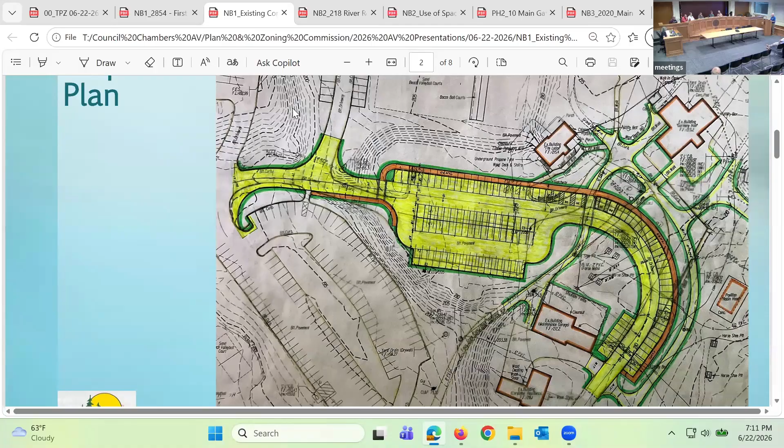So what's important is if you look at the two together, you could see how inefficient that upper existing layout is compared to the proposed. So that's what we're trying to accomplish here, and that's where the majority of our work happens.

Going to the next plan, I want to say it's a summary. Yeah, that's really the summary, rest of this is text on this. Right? So I can go back to the black and white.

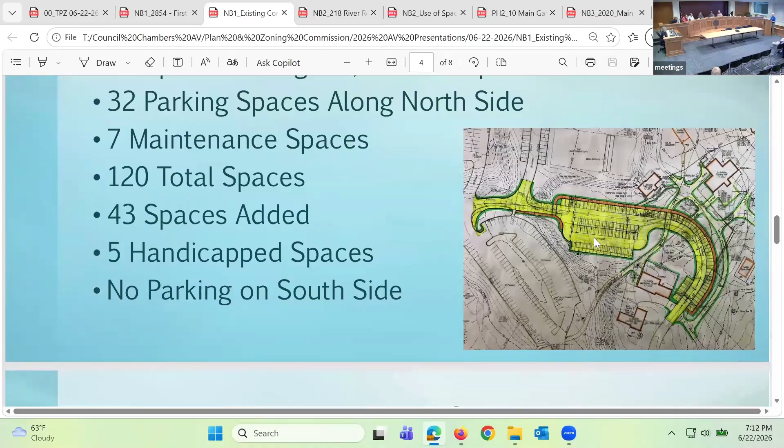Of course, thank you. So looking at this plan, it provides a nicer layout. There's head-in parking along the northern side where people would go onto a sidewalk and find their way into camp. It moves the road away from Garmany Hall, which is the heart of camp, and gives us an opportunity to provide some sidewalks for pedestrian circulation. It's just a much better layout.

As Scott mentioned, we're going to take the opportunity to make drainage improvements where we can. There are some depressed basins that'll act to improve water quality for runoff. There's a total of five, which is something we don't have today, which will give the opportunity to gather water and give it a chance to settle out before we discharge it. So that's a quick overview of the project.

And with that, I'd rather spend our time focusing on your questions. Okay, thank you sir. Commissioners, now it's our turn. Bob, I'll start with you.

All right, thank you for the presentation. I can see the efforts that are causing this modification to put the safety in, because I've been up there before and it is a little bit hectic.

Is this, what time frame are you looking to do this? Are you going to be coinciding with summer day camp? Well, that's a great question. We struggle with that. We cannot interfere with camp at all. That's not an option. And the fall's pretty busy too. You've got some big events going on.

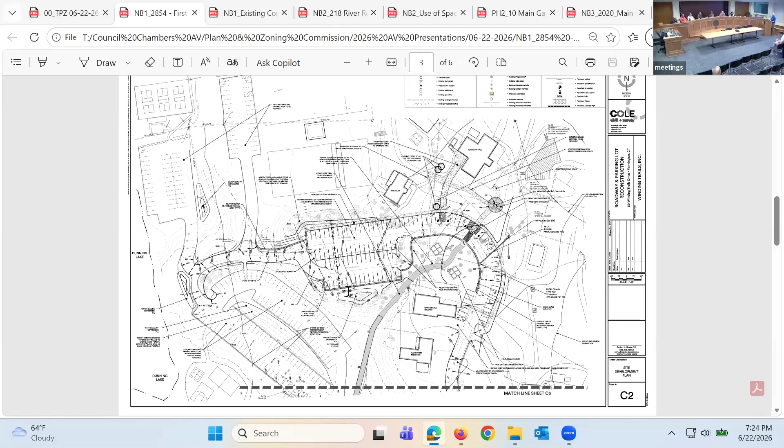Those are very good comments. I have to say the quality of Winding Trails Lake, or Dunning Lake, is the heart of our existence. We care so much about that lake that multiple times during the year we take water quality sampling. That started many years ago, and we can follow trends of water quality, so if there's any change in a pattern, we can see it immediately. We're very serious about that.

Any spillage is an important item. I have a pretty good amount of background with major construction projects and managing them. In this case, our project will follow Connecticut DOT standard specifications. As part of that general requirement, they're very specific about what things are required and what has to be done. We will make sure that if there are any spills, we can address them immediately, because that would be a disaster if something happened.

Accidents happen, it has happened, things like that. You're going to have equipment there for months at a time, doing work off and on around your schedule. Fuel tanks can leak, so if you look at the operation, they're going to do a lot of rough grading, pavement removal, processing the pavement, and compaction. When that's done, a lot of that equipment will no longer be needed.

One question, kind of hinted at during construction—are you going to follow all the proper erosion control protocols, both silt fences and the straw and wattle, especially on the inclines? Shannon, could you please scroll down to the plans a little bit? If we get to the general notes, see the general notes on the left—there's a substantial amount of verbiage geared towards exactly what you're saying. Wonderful, okay.

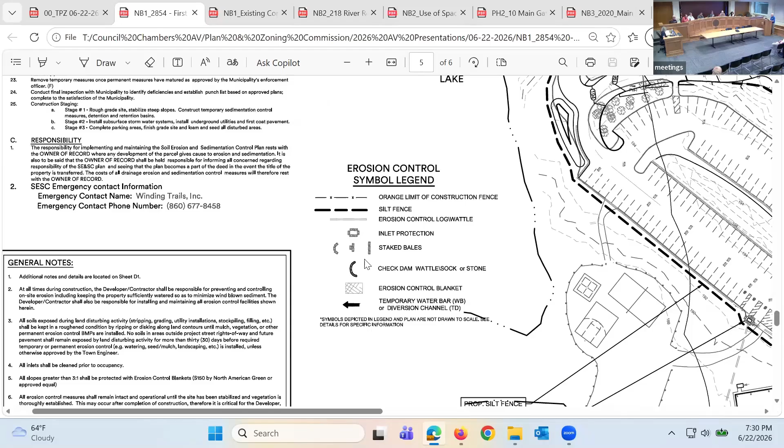Just double checking. Yeah, absolutely. You know, we're self-governing here. We would do that even if we didn't have to. We're protecting, we're the caretakers, and we have a lot invested in this, and we are going to protect it in everything we could do.

Okay, and just one other question—the water retention or depression areas. I see one by the front edge of the new, or the upper lot, I guess. Oh okay, south facing, and then what? Yes, I'm not sure of my orientation. Okay, so that's south facing. And is that going to be the main one, or are you going to do some others also?

Well, that one picks up about half the lot, a big part of the parking lot, yes. So okay, that is the largest—that will be the main one.

Okay, well that's great. I'm glad to see that sort of water quality features. It's great to have that, especially if we're getting a little bit more impervious coverage. So okay, thank you very much. Appreciate it.

And again, I want to thank Shannon for all her hard work, guiding us through this process and making sure we're doing what we're supposed to. So thank you, Shannon.

Now, because this is concurrently going through the inland wetlands process, we will not be able to vote upon it tonight. If everything goes according to plan, we will be voting on this on July 13th. So your process will proceed through the inland wetlands—they get to vote first, and then it comes to us, and then we can give a final decision. We wanted to give you a chance to speak, and for us to ask questions.

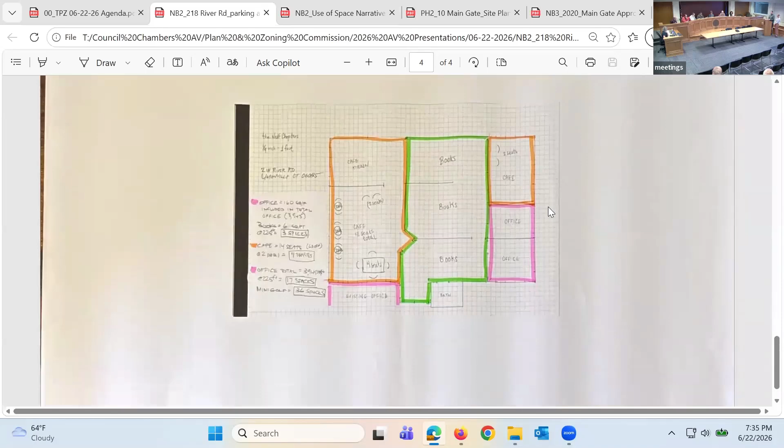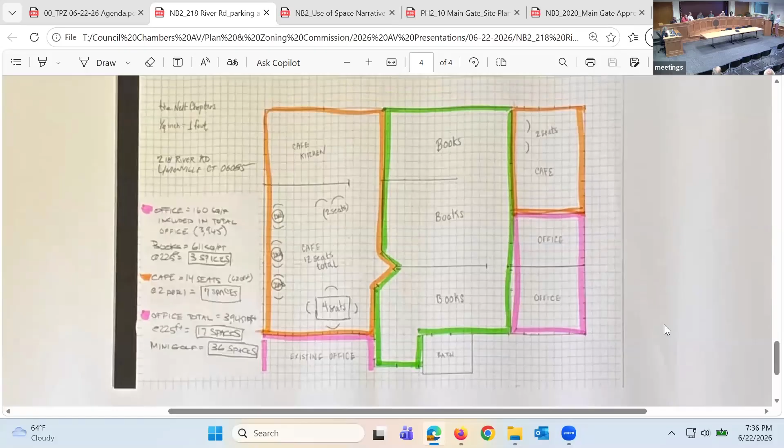basically taking the existing building and we're building out a bookstore. It happens to be on the second floor because that's what was available essentially. The parking situation is essentially the same or better than it has been in past approvals. We're actually down to, I believe, 5 shared spaces, or 4 shared spaces - I calculated 4 shared spaces. So 4 shared spaces, which in the past 8 shared spaces were approved. So we're actually 4 less than what was approved in the past. I don't have a whole lot else to say, but happy to answer questions. I think it's pretty straightforward.

Commissioners, we can start with our questions. Bob? Okay, thank you, a couple of quick questions. So this is going to be a cafe and bookstore? Used bookstore and cafe, yes. Is there going to be any cooking on site? No cooking on site, just heating up pastries and stuff like that.

What about the coffee and all that good stuff? Coffees, teas, refreshments? We're making those on site, yes. Okay, has that gone through the health department? Yes, the health department signed off on our plan. Okay, all right, and the hours of operation are here. I'm good, thank you, good luck.

Okay great, Phil? So I had trouble understanding what the request was from all the paperwork, so what is it that we're here for? We're told we need site plan approval, and it was generally for parking, to show that it's change of use from office space and what was antiques to cafe and bookstore with some office space. So the thought is the space in the building already had 8 shared spaces allocated to it, now it only needs 4? Correct. So that should still be outside the building and that hasn't changed? Right, it's all there.

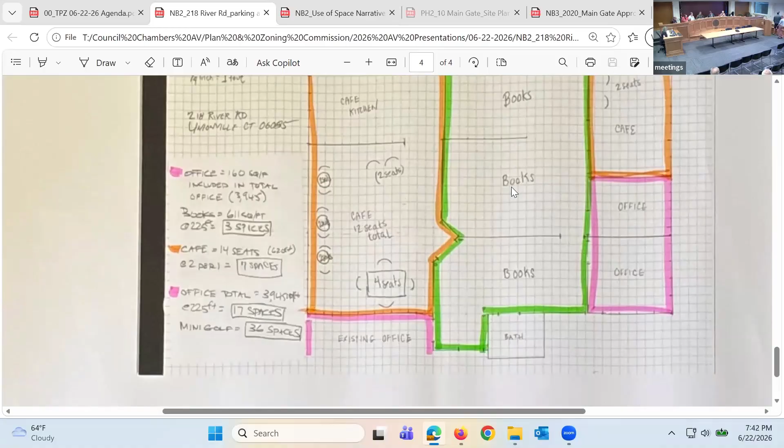I don't have any further questions. Thank you. Thank you, Josh. Dave?

I don't know if this doesn't really apply to us, but are the restrooms in there? Yes, you can see it on the plan. There's a river, right? That's - we're also in charge of aquifer protection. Right, exactly, water quality.

No, nothing in the space is changing, it's just a change in use of the parking space. You're adding the cafe on. You haven't opened yet, is that right? No, we're still working towards final approvals on the building permit.

Do you understand West Hartford has a Next Chapter bookstore already? It's different, without the 'S'. I work for the schools - they have textbooks, isn't that it? No, it's used books, all used books. I've looked in the windows. Alright, very good, just making sure you know. I have no other questions. Thank you.

I just had a question out of curiosity. It's nice to see you guys. There's two cafe sections, or is it just the book area?

There's like a main area, the bigger one is the main cafe, but we also have some seating in the other area that would be considered cafe area. It actually started as just the small room as a cafe, then the people in the back moved out, so we gained more space, which made more sense to have the cafe with windows overlooking. And where the books are, is that all seating also, or no? No, it's mostly browsing, bookshelves. I was just curious.

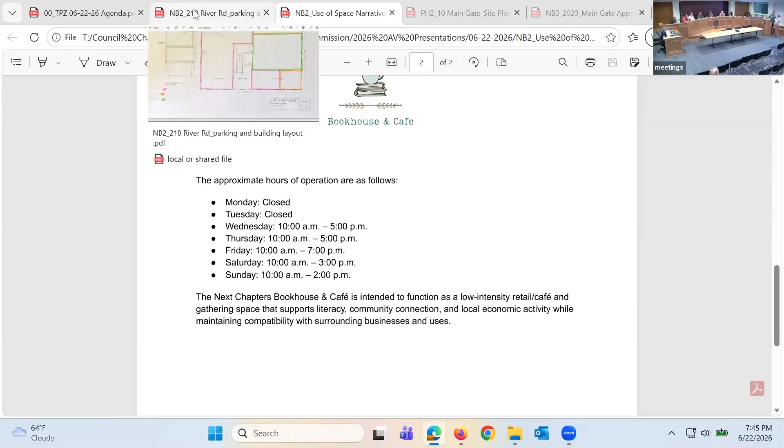So what kind of traffic are you anticipating in terms of people coming through? Because I know you're only thinking 3 or 4 spaces. We're thinking it'll be people going to the mini golf, or mothers or fathers dropping their kids off at a therapy session. We're not the daily grind coffee shop - we're not actually considering ourselves a coffee shop, though we are using the daily grind's coffee beans. But we're opening later, so we figure we won't get that morning coffee rush.

They'll go to the other coffee shops. We're really about the experience, not so much the coffee shop. We need to make money, so we need to sell pastries and stuff, and hopefully a lot of books. But we're not expecting a huge amount of traffic all at once - it's slow browsing in and out.

And you have use of the parking lot, I guess, like when the season's over for mini golf? Yeah, we'll have a lot more spaces then, October to April, where there's way more parking than we'll ever need.

Anyone else? Have all our questions been answered? I think it's gonna be very popular. You're gonna see how it fills out. I hope so. Okay, great, thank you for your presentation.

We need a motion and a second for this issue. I'd like to make a motion to approve the application for site plan for Next Chapters LLC for a cafe bookstore use on the second floor and review of shared parking for development at 218 River Road in a C1 and FP zone. A second. Okay, let's vote - all in favor? Aye. Opposed? Abstentions? Motion carries. Good luck. Thank you.

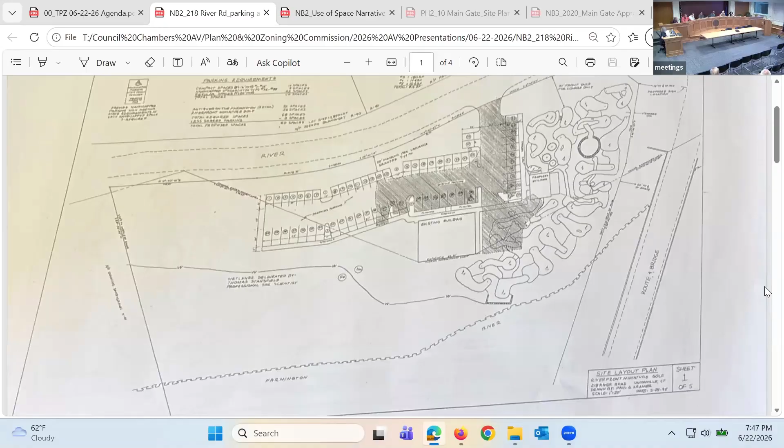Okay, and now we need to accept an application from Metro Construction Corp. I'd like to make a motion that we accept the application made by the Metro Construction Corporation for special permit and site plan modification for intensive construction activity for crushing of concrete foundation, sidewalks, and retaining walls, Monday through Friday, 8 a.m. to 2 p.m. for a period of 8 weeks at 20 Scott Swamp Road in the SSROZ zone, and schedule a public hearing with the recommended hearing date being July 27th, 2026. Second? Okay, all in favor? Aye. Opposed? Abstentions? Okay, motion carries.

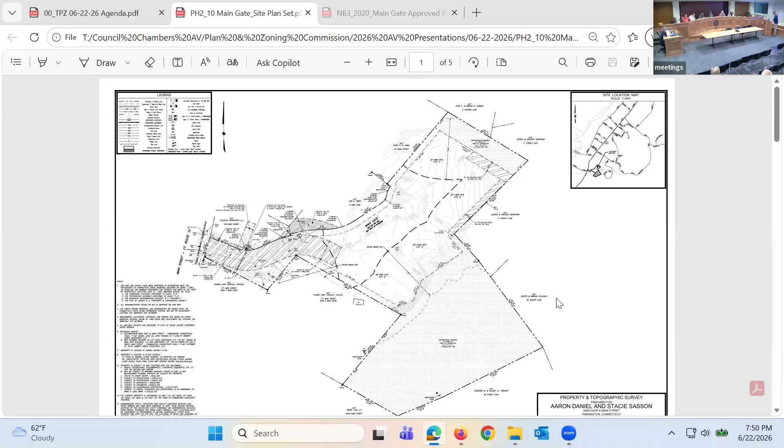Excuse me. A very nice family saw this property and fell in love with it. They would like to propose their dream home, somewhere to make memories with kids, hence the pool house, trying to keep their kids there. I myself actually want my kids out of the house once they turn 18, but they want them returning, which is great, kind of speaks volumes to who they are.

The size of the home was designed with the fact that aging parents will probably move in with them. We also looked around at a lot of the adjacent properties, not far different from the one we're proposing right now, and on smaller properties. This amounts to about 5.5 acres. A lot of those properties are under 3 or even 2 acres. A lot of the properties on, and forgive me, I'm forgetting the names of the roads, I think this is Hatters Lane, I believe. Hatters and Dorset. So, about equivalent size homes, but on smaller parcels.

So, having fallen in love with the property, the owners, we thought that the size of the building, the accessory structure, fit the property. We're not trying to cram a 3,000 square foot home into a 1 acre lot. Dealing with 5.5 acres, we felt that it fit the property appropriately in the area.

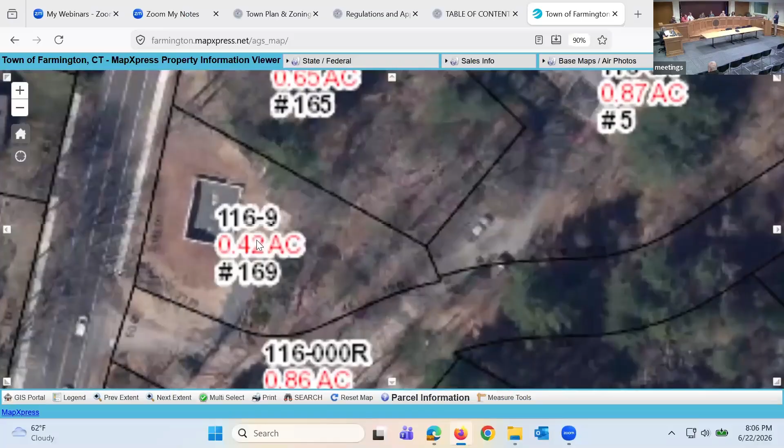Let me come in. Here we go. So what you're seeing on our GIS, this is the vacant foundation, that's the one that burned down. That house fronts right on Main Street.

And then the conservation easement, I just forget the mechanics of that. So if it's an easement, it's just in conservation, but it's still owned by the owner of the property, right? Correct. It's not open space or publicly accessible. Correct, there is an encumbrance and it's already been filed on the land records. So it's reported as part of the development and building permit and CO process. The medallions will all go in, but the legal instrument has all been recorded on the land records.

Thank you again, appreciate it. I don't have any other questions at this time. Thank you, Josh. There you go, thanks. Question for you.

Where's the driveway going and coming off of? It's right here, just opposite Tunxis Street. So the driveway is an existing driveway, about 50 feet north of Tunxis Street on the opposite side of the road, and comes up and provides access to the 2 existing homes, and then we'll provide access to this 3rd home. So it's shared for a portion? Yeah, it's a shared private driveway.

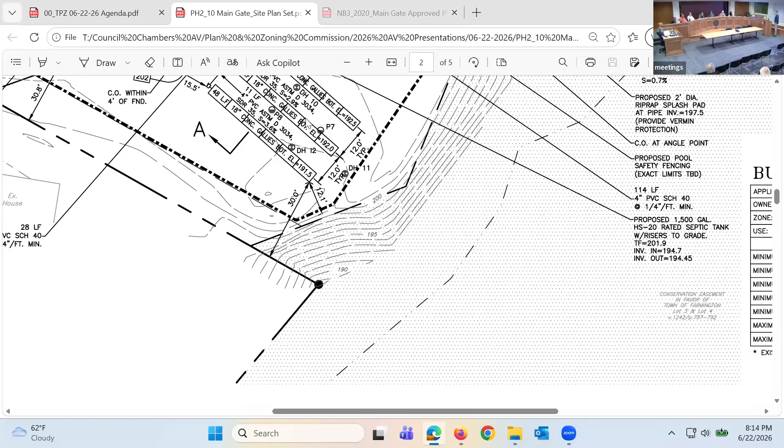No, the elevation from where we're working to where that brook or stream is - you can't even see it unless you're on top of the hill. Yeah, it's probably a good 20 to 30 feet down from where even the septic system is down to where that brook is. Good question though.

I would love to take a look at it - well, I should probably look at it, I live in the area, I walk there a lot. Yeah, one day there was a pond and the next day it wasn't - which was a shame because it was a real nice pond actually. Yeah, it was a nice little feature, but it still shows on Google old maps. Old dams go away of their own volition, and it's costly to rebuild. Yes, definitely.

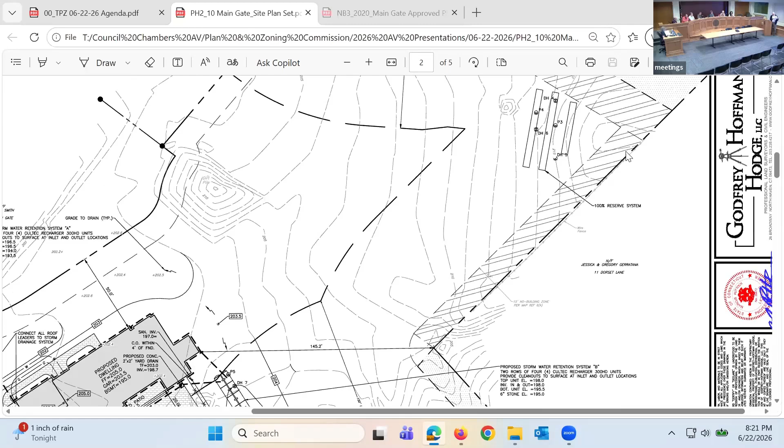And then secondly, on the plan, closest to our property, there are some rectangular designations identified as 100% reserve system. There are three rectangles with some designations, D and B. Can you clarify what that represents?

And lastly, I wasn't going to comment, but before moving to Farmington, I had a home with a pool house, and a pool house sounds dramatic. In fact, our pool house was twice the size of the one being considered tonight. I wasn't going to make a comment, but it's really for 700 or 780 square feet. They're really changing rooms with a common room, and you might have a refrigerator and something along those lines, to make it more pleasant for the people using the pool.

So personally, I don't think a pool accessory building of this nature is out of character or too large for the property, and I don't think it's going to be rented out as an Airbnb where other people come in. So as a neighbor to this property, I would not object to it. And I've reached out to the owners already, welcoming them to the neighborhood, assuming that you're going to approve things as presented. So thank you.

You're very welcome. Okay. Should I have Mr. Levesque come up and clarify the questions about the plan? Sure, you can, however you want to do it, Madam Chair, if you'd like to clarify those.

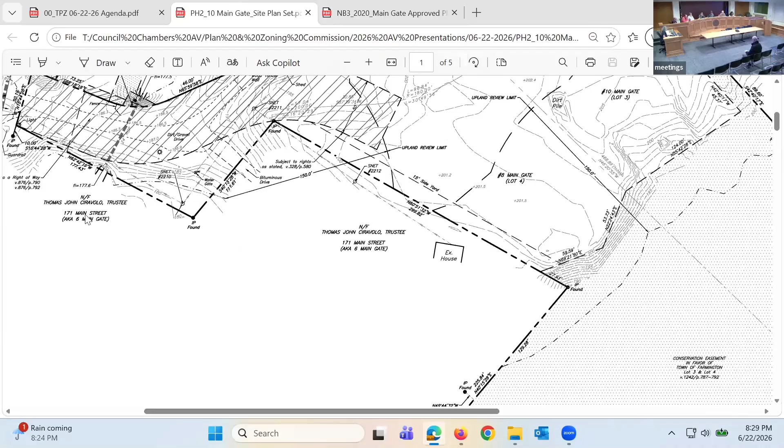So the trees being cleared, did we really talk about what was being cleared there? Sure, well the trees, right. So in order to get the driveway up, I know one of the residents asked about the driveway. I don't know if we've got a full plan with a full profile for the driveway, but you can see, and it's tough with this one because there's so many different easements and shared access easements.

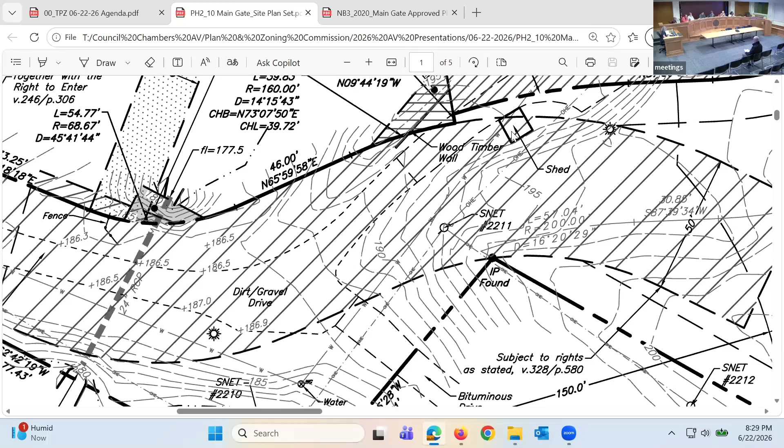But there's a dashed line coming through here, that's the edge of driveway, the existing edge of driveway up to 5. This is the little shed that Mr. Levesque made reference to. And then this is the driveway to 6. So their driveway is going to come in right basically through the center and continue up through. Mr. Levesque would have to answer whether or not there are any changes south of where their driveway connects. I don't believe there are, but Mr. Levesque would be able to answer that better than I can.

So if you would like, you can come up. Yes, please. Question was whether there's changes further down towards Main Street.

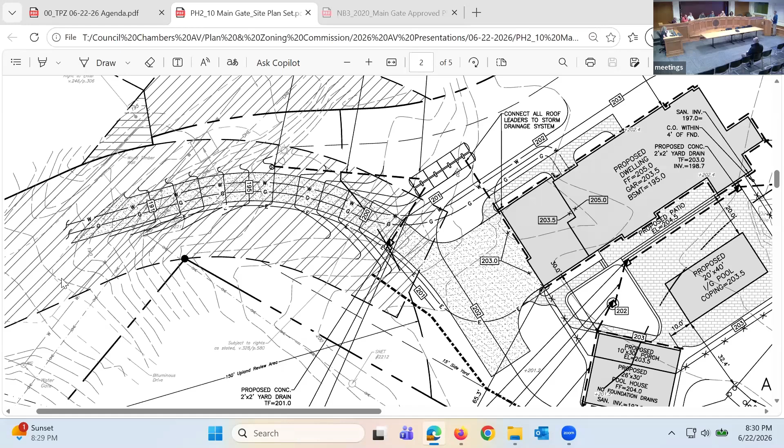Correct. How far down are the driveway grade changes taking? So there's gonna, probably pretty much at the fork of the road there, right? We will be knocking down the grade a little bit going up to the property, not knocking down the adjacent property driveways, but rather the grade in between. Not messing with any of the grades into the existing driveways.

There will be work from Main Street to the properties here. We're bringing water and gas in. The water and gas is already stubbed in. I did that prior to Main Street being paved. Geez, yeah, 2019? A few years ago. Yeah, so more than a few, water and gas stubbed in prior to the paving. So that work is being done from the street up.

So the driveway then will be paved out to Main Street since you're gonna have to excavate to get the water and gas in. And by the time the construction trucks are back and forth, so you will pave down to Main Street. Correct, yeah, paving will be all the way down to Main Street.

There is, yes. No, that's the drawing I was looking at, was to show how close the driveway is to the neighbor, I believe, who's to the south. Is that who I think who spoke, right? So it's about, I don't know, more than 15 feet, but maybe less than 20-ish. Here's something like that, so there's a 15-foot yard setback. Right, and then here, that's the driveway, right?

That, and this is the hammerhead for spotting the driveway. Yeah, correct. So that's probably roughly 20-ish feet, somewhere, yeah, 15 to 20 feet. This is 30 because this is a 40 scale drawing, so we gain distance really quickly. Sorry, yeah, it says 1 to 20 scale.

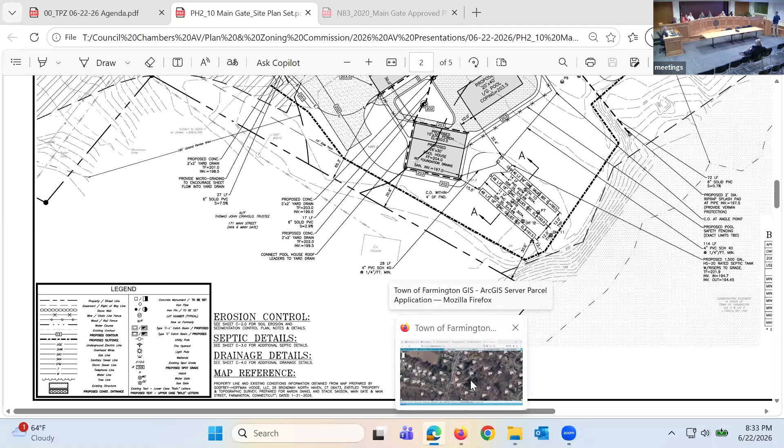Sorry, I'm repeating myself. I'll stop talking. No, you're good.

Currently there is, along the whole row at 6 Main Gate, all large mature pine trees, so really no coverage. The majority of the property is very small growth, smaller trees. There's a handful that are like 20 inches or so, but relatively small, and there's a lot of dead brush in there.

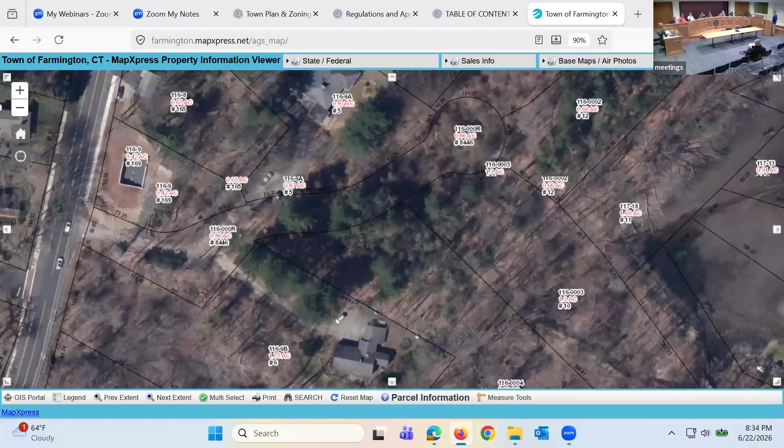So we will be adding screening along there, I want to say arborvitaes, something that's green all year, but adding a row in there because the current owners do want privacy themselves. That was always a thought, just adding privacy there.

The pool will require a fence around it, so that adds another portion of possibly privacy on that edge of the property.

Would you be amenable, and I guess if the owners are online and want to answer, to it as a condition of approval to add evergreen screening along that property line? We can discuss how long along the property line or where it makes the most sense, but just put that as a condition?

I think that is something we could possibly discuss. I'd rather talk to them.

And if that's a condition of approval, then that's something we can work with Shannon on and come up with. Are you looking for like a linear footage or something? Yeah, I want to be specific.

If the commission agrees that's a condition we'd want to have, I think we want to be clear about where it is. I don't know the property very well, so I'm making guesses here, but somewhere before the end of the driveway, alongside, maybe right around there. Down, I don't know how far past, maybe down to that turning point.

So to give you an idea, like you can see the existing house is here on 6 Main Gate. That's pretty good size, pretty close there.

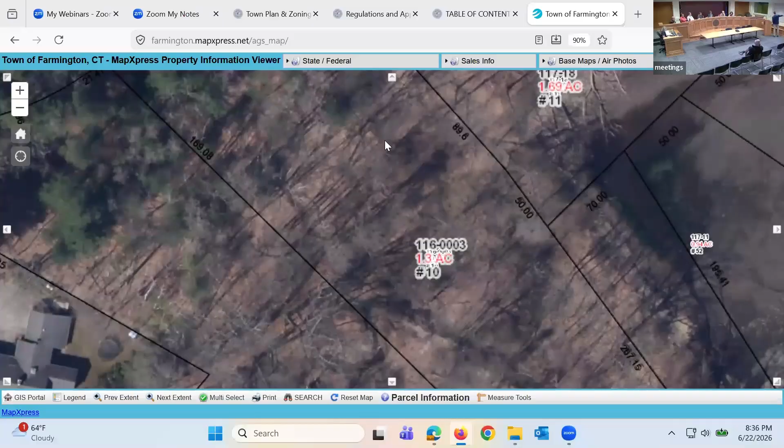About 20 feet behind, the half box right there is all woods. Don't quote me on 20 feet, it could be more, but it's pretty close, maybe 20, 30 feet. The property line is probably more than 20 feet, but yeah.

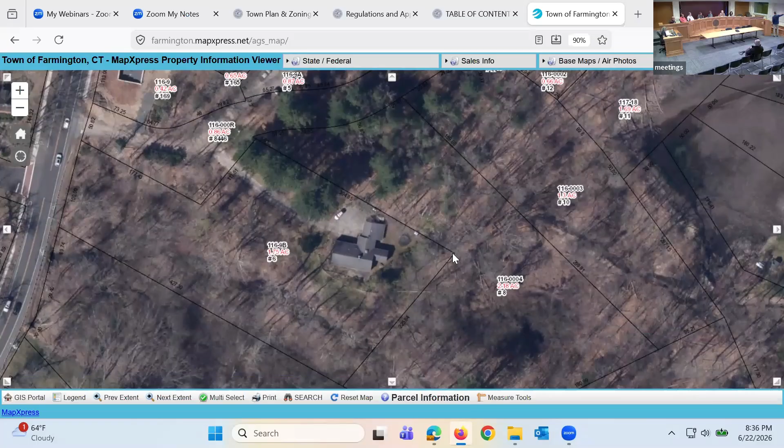And then that turn we were just talking about is right there. So his property is very close to the line, unfortunately in this case for this situation.

So I believe that's the garage. You've got the property line, this is the portion of the house that shows on the survey, and that's the property corner that shows on the survey. So we've got the garage portion and the property corner, and when we pop back over here, this is the same garage corner and that same rear property corner, which is tying out.

You can see this topography drops off, you've got a 10-foot drop, and this is the Dorset Pond behind everybody, that was referenced earlier in the discussion. So I'm thinking somewhere in this vicinity, and I can measure it on the aerial.

Madam Chair, if you're amenable, if the owner is still on, we could ask them if they want to comment. It's up to you, but I think that would be appropriate. We are in discussion, let's see what Shannon gets.

And these trees are on 6 Main Gate, so those are already mature evergreens, but one will probably come down, it's hollowed out on the bottom. They tend to look, it's roughly 150-ish feet.

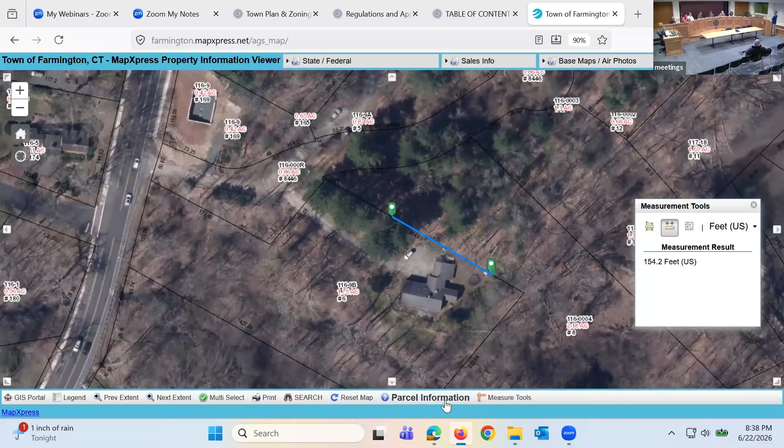So let me make it very specific so the property owner can comment. Specifically, we would put a condition of approval that there be a full evergreen screen along that property edge we're showing on the map, extending roughly between 100 and 150 feet, to be determined by staff, from roughly 20 or 30 feet before the end of the driveway to somewhere towards the back property line.

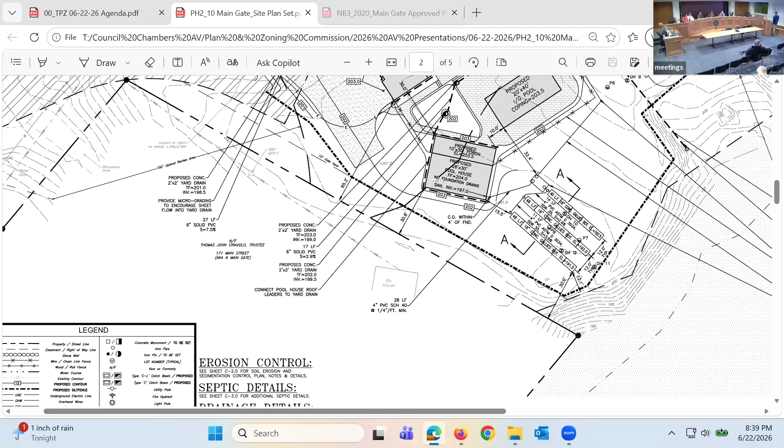So that would be sort of my proposal, which we're not voting on. I'm just trying to work this out for discussion. Specifics are helpful here.

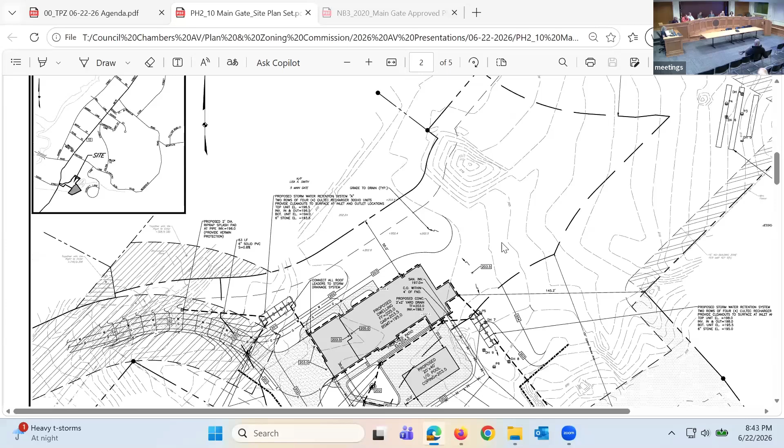So today, right, not approved - yes, somebody could come in. The subdivision that Mr. Levesque got expired, gone. Somebody could come in and get a reapproval of that. The Sassans have asked to build this house. With this house as it is shown and presented, I would have to agree with Mr. Levesque's statement. It is probably almost impossible to extend this driveway beyond and then get another legally conforming lot up here.

Could some creative architect, engineer, or surveyor come in and want to do that? Perhaps. I'd have to take a look at how many houses off, at what point does it become a rear lot - it's a private driveway, so there's a number of things that come into play for us from a zoning standpoint that I can't necessarily just fly off on a cuff here. It is probably very unlikely. I won't go so far as saying impossible, because we've seen some pretty creative individuals come through.

Okay, that's helpful. I'm just thinking that there's having one house rather than four. Correct, I think at the most you would get is one other lot back in this area. I don't think you would start to get more, and then again you start to lose the privacy, lose all those other things. The conservation easements stay in - those are already in, so those are already safeguarded, if you will, with no build areas.

All right, thanks very much. Sure, okay, thank you. So that answered all your questions. Anybody else have anything come up?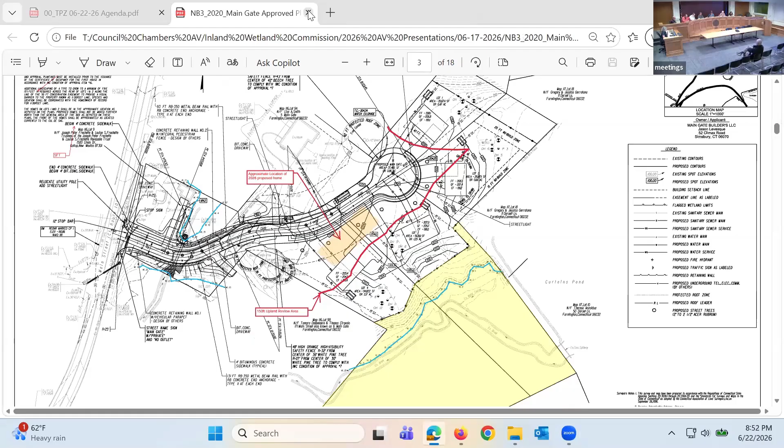Okay, now we're on to planners reports. I've got a few things to run through for all of you.

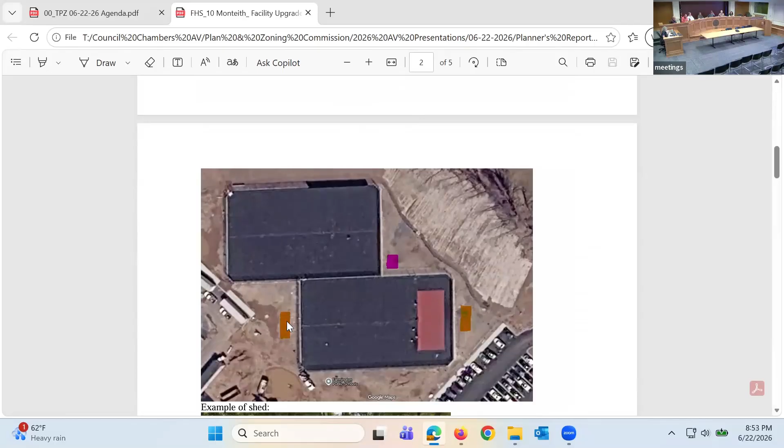High school, 10 Monteith Drive. The athletic director has made a request to add a shed at the tennis courts up by Town Hall, adjacent to the new Town Hall. The shed is shown here in purple, and he's also requested bleacher pads on either end of the tennis court, with a sample of the shed and a sample of the prefab bleachers.

There's also an existing shed at the upper field that he is requesting to replace. The new shed will likely be placed immediately adjacent to the old one, the equipment moved, and then the old shed removed. Again, they're standard prefab sheds.

The sheds are each under 200 square feet, so they would not require a building permit. If the commission is agreeable and has no concern, staff will move ahead and coordinate this with the athletic director, not proceeding with a formal site plan application unless the commission feels otherwise.

Any questions? Would this be handled by Public Works? It's probably going to be a combination of our Public Works and the school facilities crew—a hybrid, collaborative project.

So did you say concrete pads for the bleachers, but gravel for the sheds? He's intending to put a concrete pad down for the shed as well, though it may end up being stone—a lot of sheds go on a stone pad. He's indicated concrete, but that could change. The bleachers, I think he indicated, will be put down on a concrete pad. Thank you, that makes sense.

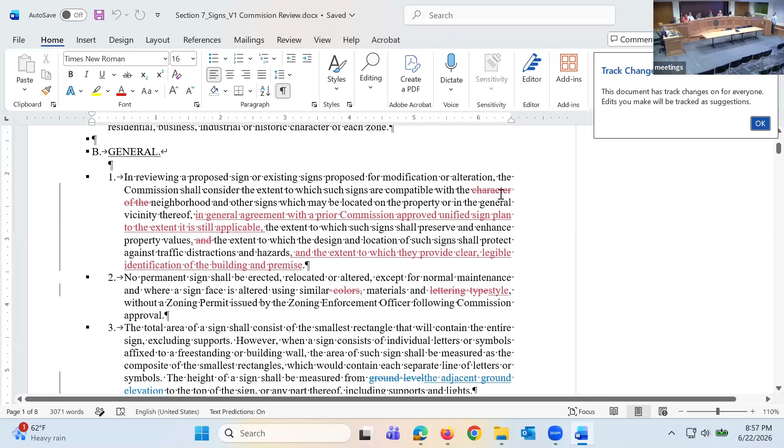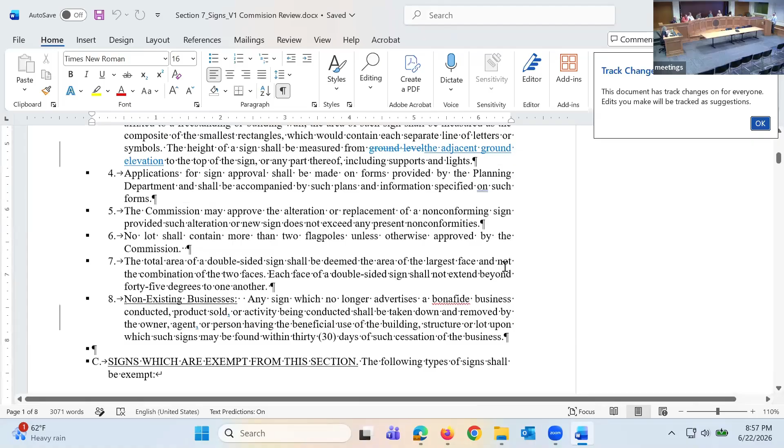For the signs, I didn't do a nice PowerPoint like Garrett did for the other two, so you've got the track changes. We had talked about a good chunk of these at differing points in time, and we took the opportunity to clean up some of the general text, getting rid of things like 'character'—we're not supposed to be talking about character of the neighborhood. We also talked about how to measure signs. These are just general text edits in this first section. We didn't change the purpose.

Signs exempt from this section—we talked about flags, which had been in there originally and have always been exempt. This wording has been re-scripted to be more inclusive and more aligned with case law. We capped it at a 40 square foot area and a 30-foot height. That's more for a larger institutional use—obviously you're not going to get that on a typical residential lot, you'll see that height and size in a more institutional area.

Is that where it says two—I read somewhere two flagpoles? Two flagpoles, which is what we had allowed previously, and up to technically 3 flags—well, you can fly 2 flags per pole, so technically 4 flags, but yes, 2 flagpoles, that's what we had allowed previously, with the ability for the commission to approve sizes, pole heights, quantity, and flag display practices other than those prescribed above, so there's some flexibility with review and approval on your part.

Shannon, would that include just hanging a pole on a wall or a post like that, that isn't a flag? No, we're typically talking about a full flag.

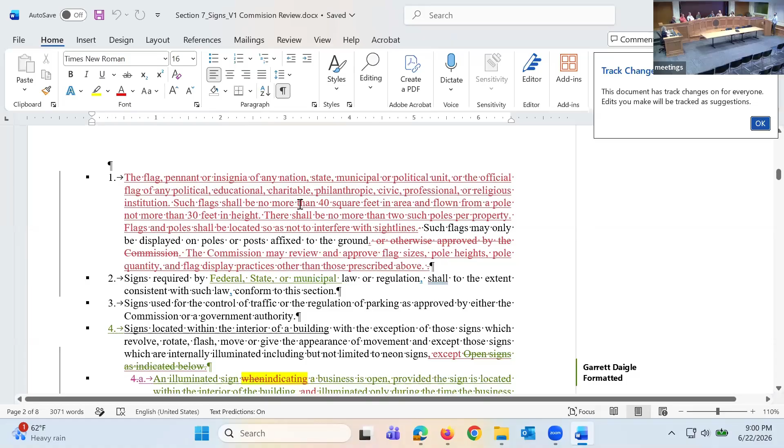I'm not saying we should, I'm asking. So this was part of the regulation originally, in the sign regulation, as signs which are exempt from this section, and a flag. Oh, I missed that, sorry. So it's part of the exempt signs, that's the part I missed.

You can go do this anyway, signs which are exempt are basically allowed by right. It's only when you want to put up more than two that it changes. You're good, I recognize this is the first time you're seeing it, and you wouldn't have had a chance to go through most of these by the time you got through the applications.

But are we limiting them if we say they can't say 'open' on their giant flag? Technically, that's something I've got Bob DiCrescenzo taking a look at because I took exception to that. If we're allowing a business to have a sign on the business and a detached sign, and we're not preventing somebody from advertising their business, I feel we should be able to limit the content of an open sign or a directional sign.

This pendulum swung way far to the other side. If it's an open sign, it should just say open, right? It doesn't need to say everything else, or have insignias or emblems on it. So we chatted with Bob, he understood where I was coming from. He thinks we may be able to have some limitations, and he's looking further into the case law.

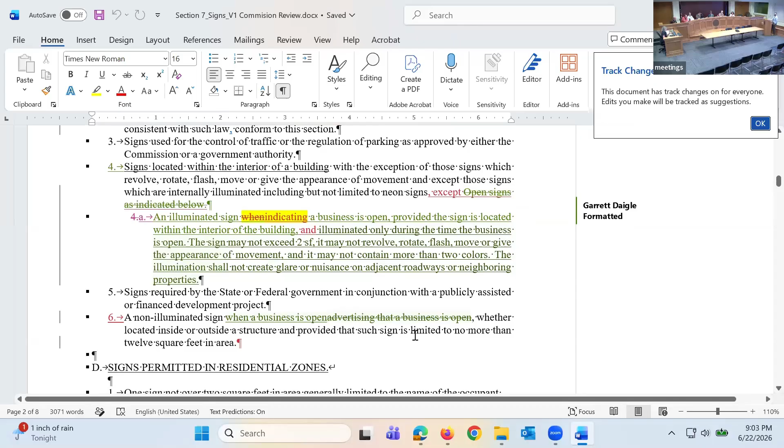So this is signs within the interior of a building. We talked about open signs, an illuminated sign indicating a business is open, I think it still says open sign. We talked about the illumination and size of it, and that we don't want it to rotate and flash. So an open sign is permitted, it's exempt and would not be regulated by the commission, assuming it fits these parameters.

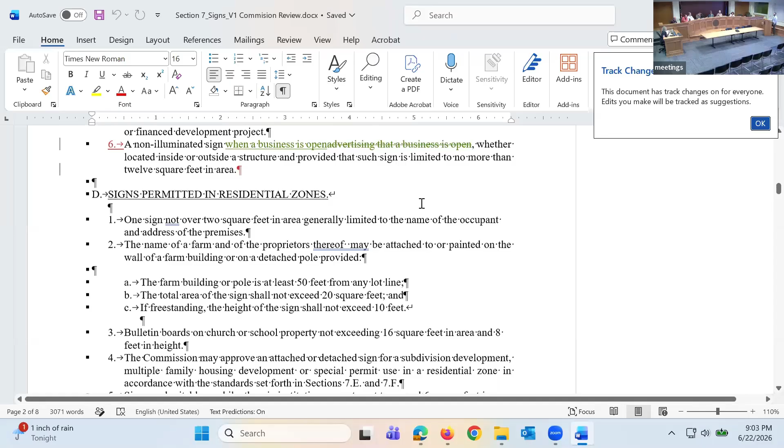So it would be allowed by right, and that finishes that section. D is signs permitted in a residential zone. We did not change anything there, except I changed one thing for a charitable and philanthropic institution sign not to exceed 6 square feet, and the sign shall be located at least 15 feet from the edge of the roadway.

Section E was attached signs. Rather than listing all the zones, we've simplified it and said all non-residential zones.

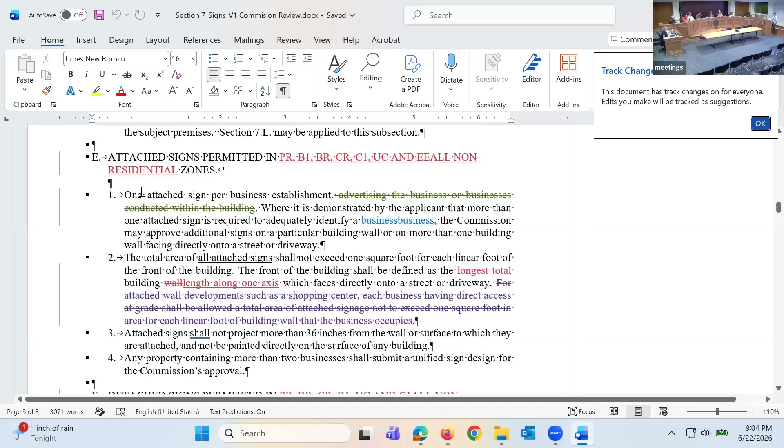We worked through some of the wording in the first paragraph with respect to the second paragraph and the measurement of the building for attached signs. The wording I opted for was the front of the building shall be defined as the total building length along one axis. Axis being your XYZ axis - so if you're to slice that building, I felt that might be the easiest way to get out of this discussion of various jogs and fenestrations on the building. It was just an attempt, so I'm certainly open to conversations regarding it.

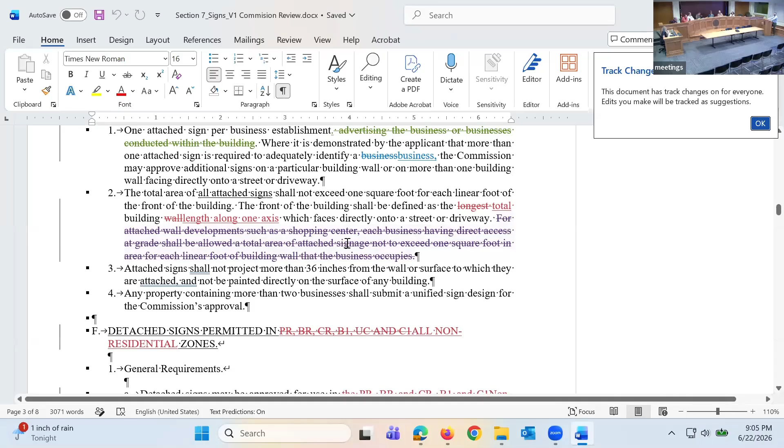I then removed the next sentence, which talked about attached wall developments on a shopping center and each business having direct access. At that point, I thought if it's a shopping center, then they divide it up by their square footage or how their tenant or lease agreement starts to work. But from our standpoint, it's the total length, that axis line is the line, and that's your square footage that's allowed. As a building owner, you can divide that out among your tenants as you see fit. I'm also not married to that, but I took it out. We don't have to - that's up for discussion - but that's how I addressed those items.

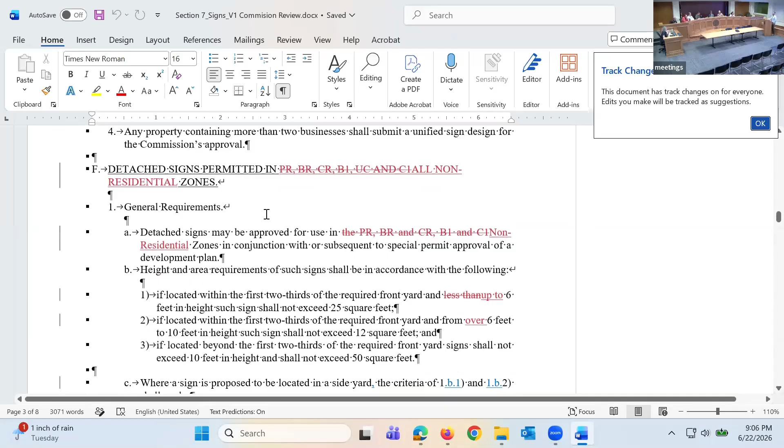F, detached signs. Again, we said all non-residential zones, detached signs - so there are monument signs and pylon signs. I don't think we changed any. The only thing I changed was the up to 6 feet and the over 6 feet, because the less than 6 feet was proving we'd get 5'11" signs, which just seemed silly. So up to 6 feet is a 25 square foot allowance, over 6 feet and up to 10 feet in height is a 12 square foot allowance.

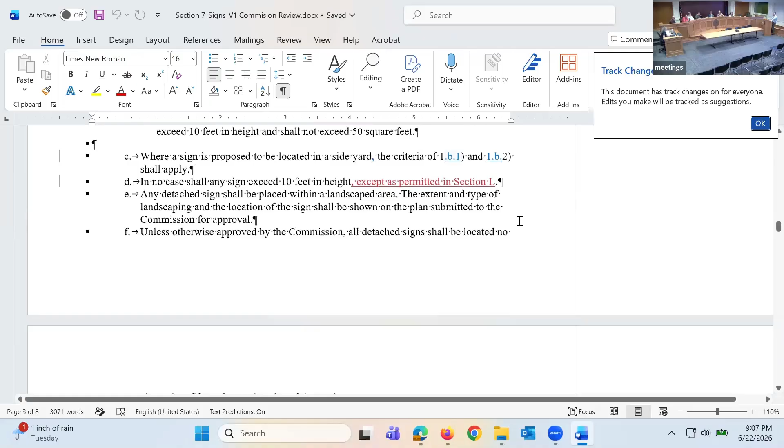And these references on C are just a clarifying mechanism to these B1 and B2 items above. And then in no case shall a sign exceed 10 feet in height. I added except as permitted in section L, which is that waiver that we've used on occasion when you've got topographic changes, and there's waivers permitted for height or area for circumstances that an applicant presents.

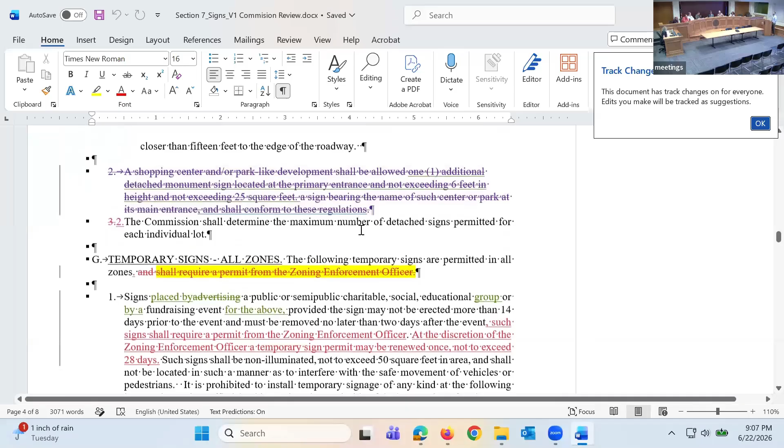I got rid of 'shopping center or park development shall be allowed one additional detached monument sign at the primary entrance exceeding...' all that, and simply left this last one that said the commission shall determine the maximum number of detached signs permitted for each individual lot. It seemed duplicative - if you have the right to determine the maximum number of detached signs for an individual lot, if somebody wants an office park to have an additional monument sign, then you're well within your right to consider it, and it will meet these parameters already noted above. Again, I'm happy to put it back in, that's certainly open, and any of this is obviously open for discussion.

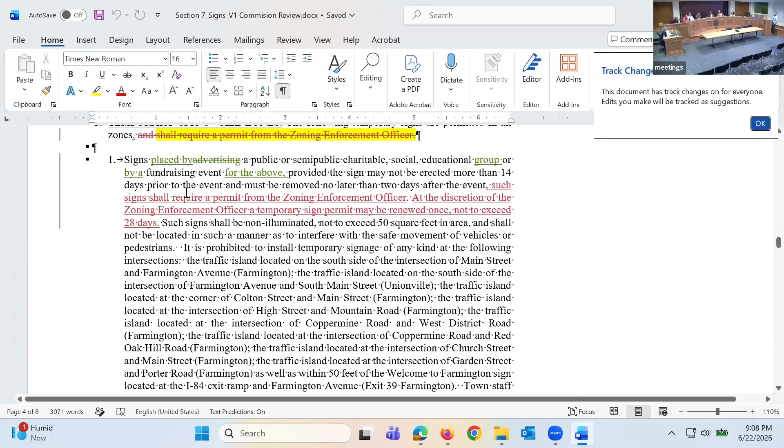Temporary signs - we got rid of 'this shall require a permit from the zoning enforcement officer.' Over, I think there's 6 or 8 sections. The only one that we issue a temporary sign permit for are the charitable and educational group signs that go up when whatever the Rotary Club is having an event, or the Chamber of Commerce, or the police department, or when Little League has signups. Those are the only ones we do temporary sign permits for. The rest of the signs discussed, we don't do temporary sign - we never have. I mean, they're real estate signs.

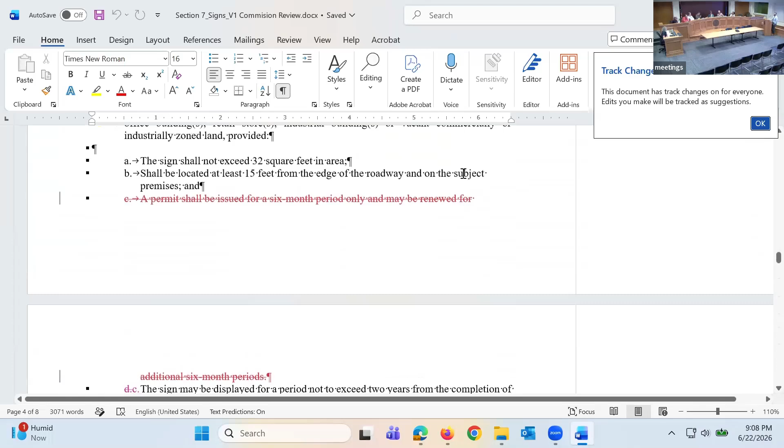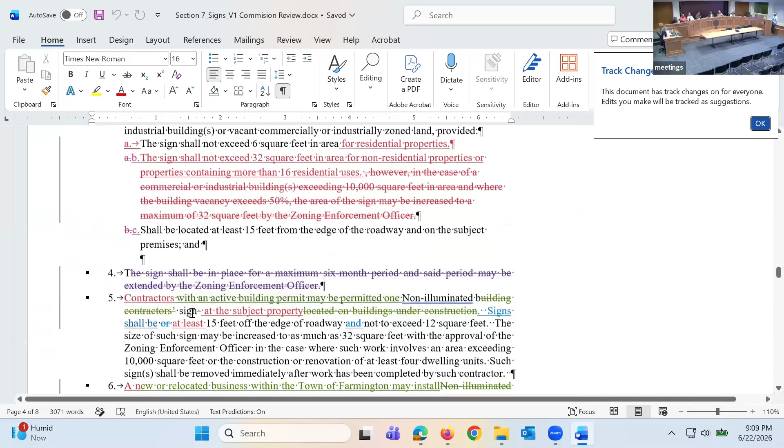Sections 2 and 3 are real estate signs in essence. Section 2 is when it's a property or a new subdivision or an entire new complex or a substantial renovation, and section 3 is basically for an individual lot, an individual home, or your traditional realtor signs. And then there were some numbering errors and discrepancies here, so we had to clean that up as we were reading through.

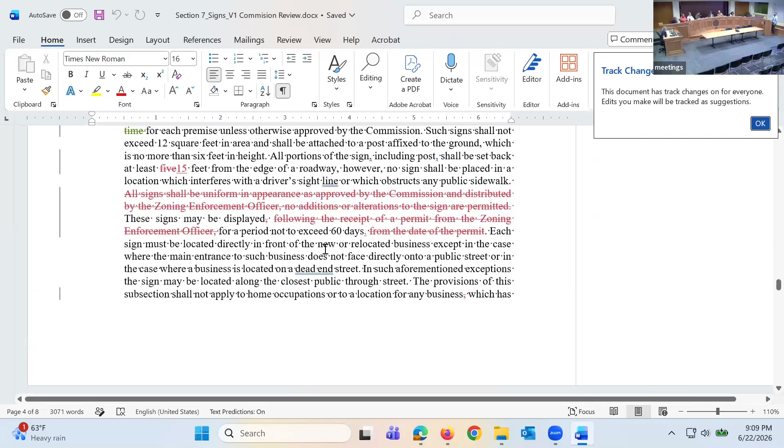Contractor sign for an active building project, and a new or relocated business in town, basically advertising that they're new to town or their new location. So again, these are not new sections, we just tried to clean up some of the wording so it aligns with some of the practices that are in place. We left the traffic control signs in, off-site traffic control signs.

Technically they go to our traffic authority, it's Russ Arnold, our town engineer.

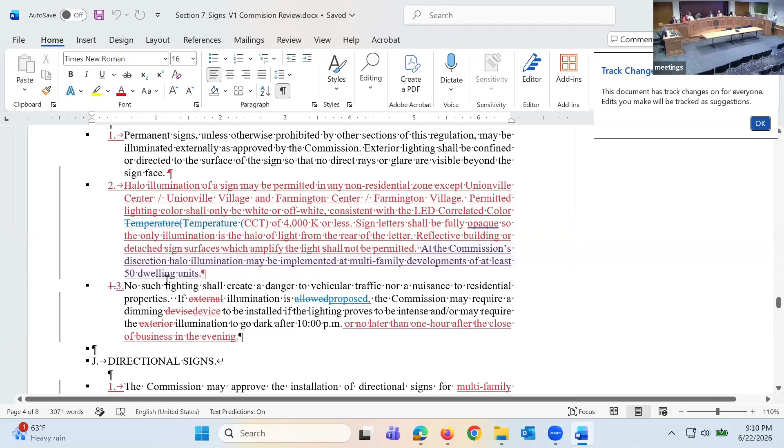Illumination. Halo illumination is discussed specifically with specific parameters and specific locations. So you all can read through that, let it percolate around a little bit and see what you think about that and what you'd like to do. We did add it in for residential at the commission's discretion. Halo illumination may be implemented at a multifamily development of at least 50 dwelling units. It's an arbitrary number, but we felt it needed to be something of substance. You didn't want it on a duplex or a triplex, but something of notable size in order to warrant having halo illumination.

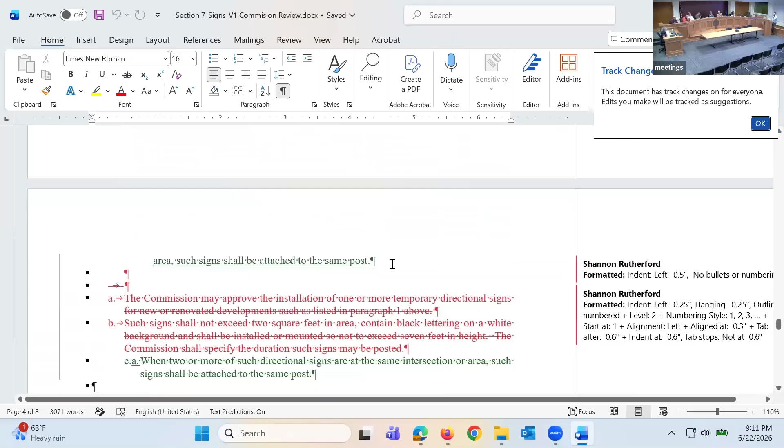Directional signs got revamped a little bit as discussed. We had talked previously and edited some of the areas, discussed location and where they could be internal. I think this is a carryover from the original: when 2 or more directional signs are located at the same intersection, they'll be attached to the same post.

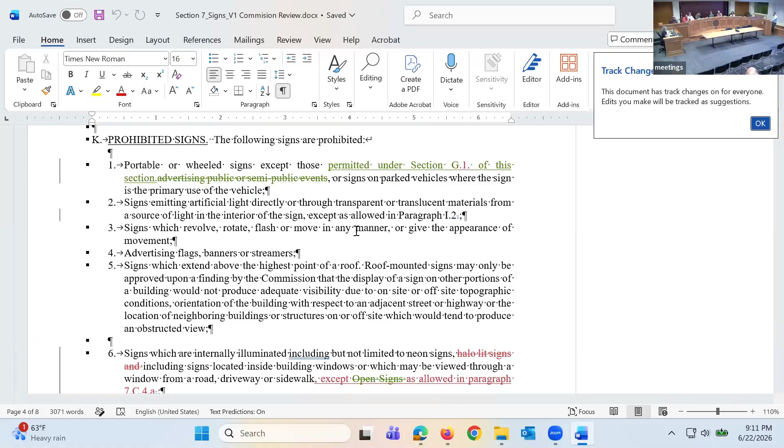The prohibited signs list was updated. Portable or wheeled signs are actually permitted under G1 with the temporary signs, like Winding Trails uses their wheeled sign out at their frontage, and the Tunxis Hose uses it for the Fireman's Carnival and a variety of things in the center of town. Those are really the only two I can think of off the top of my head. Halo signs are removed from the prohibited signs list, just added back up in the illumination section. And section L, the exceptions, we didn't touch.

So I think we've got the open signs, attached signs, directional signs, and halo signs as the bigger ones that we tinkered with. Most of the rest is just contextual cleanup. I'll poke at Bob - I've got a number of meetings this week and I'm out the end of the week, but I'll get a response regarding how much latitude we have with the directional signs and open signs, or at least if he's okay with it being defensible for now, and we'll go with it.

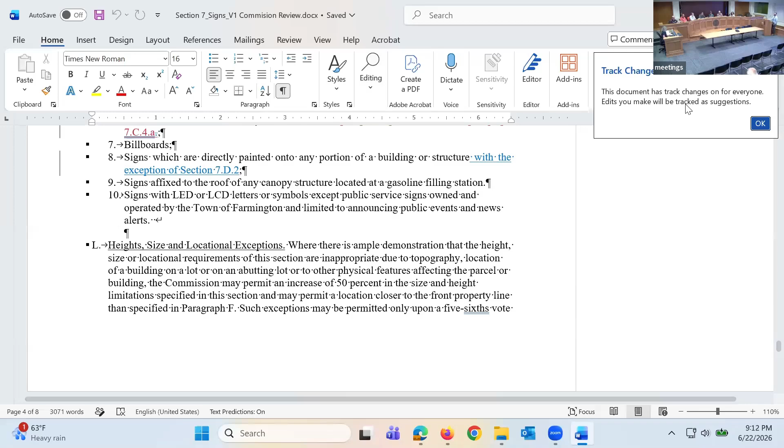I know I hit that again, it's like a bad speed dating episode, but if there's any immediate questions, I'm happy to answer them. No, okay, we'll move on - a little bit to digest.

All right, solar. Garrett, you want the PowerPoint? Yep, that'd be great, because it's got the whole regulation in there, so that's fine. Okay, all right, ground mounted solar.

I believe Shannon mentioned this in the last meeting, that this was something staff was working on, as the zoning regulations don't explicitly permit ground mounted solar. We had been permitting them under a different regulation, but figured it would be best to create its own. Can I ask, before we get into it, what's driving the need to have this beyond what you've been using? What problem is this solving? It's for clarity - just to explicitly state that you're allowed to have it. We had been processing them as site plan applications under the regulation for ground mounted antennas, the big satellite dishes people used to have that they don't have anymore. By creating its own regulation, we can say this is what you're actually applying under, and this is the criteria you have to meet. We'd been taking liberties lumping it under the antenna and satellite dish regulation, so this creates its own designated area for clarity and conciseness.

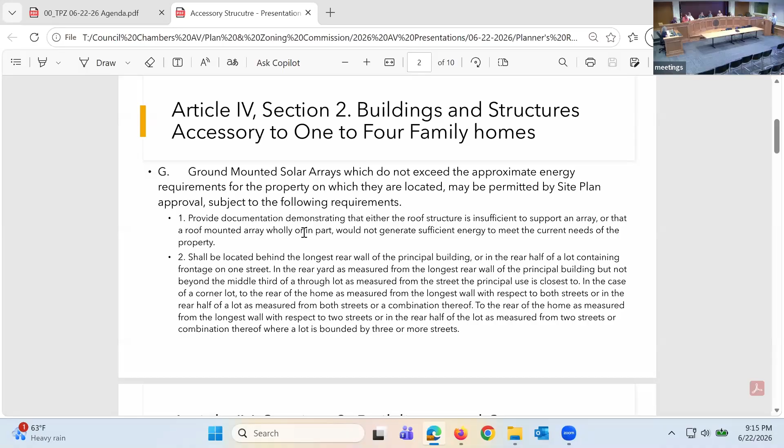So you'll only be allowed to have it ground mounted if you can provide documentation that the roof is insufficient to support the solar array, or it wouldn't be productive enough to reasonably install on the roof.

We have had properties submit shade reports. So if I've got an example, somebody wants a larger solar array though.

They can't—Eversource won't allow them, even if they don't connect it to Eversource. You don't have that. Well, this would limit you. The regulation explicitly limits you, so regardless of how you're going to use that power, whether you're going to interconnect or not, the town is in a residential zone limiting them to that.

Yes, we only allow ground mounted solar arrays which do not exceed the approximate energy requirements for the property in which they are located. And then again, this would go through site plan approval, so it would come to you. It's not by right.

They can just show a shade report, or if the house has a north-south roof line, you want a south-facing roof. I'll show you some examples, but unless you've got a south-facing roof, you generally are not generating enough power. It depends on the orientation and all your dormers and stuff like that. But they'd have to prove to you that they will not generate sufficient power if located on the roof.

We'd require that the arrays be located behind the longest rear wall of the house. This is the same wording from our shed regulation.

If it's a corner lot, it has to be in the rear quadrant. I've got an example of that I'll pull up in a couple slides to explain what the rear quadrant is. For a through lot, it'd have to be in the middle third—I don't have an example of that, but it's the same principle. So if you've got a 300-foot property line, street to street, 100 feet in on each side is your middle third. That's where you could put the solar array, and it's also where you can put sheds and pools and all that stuff.

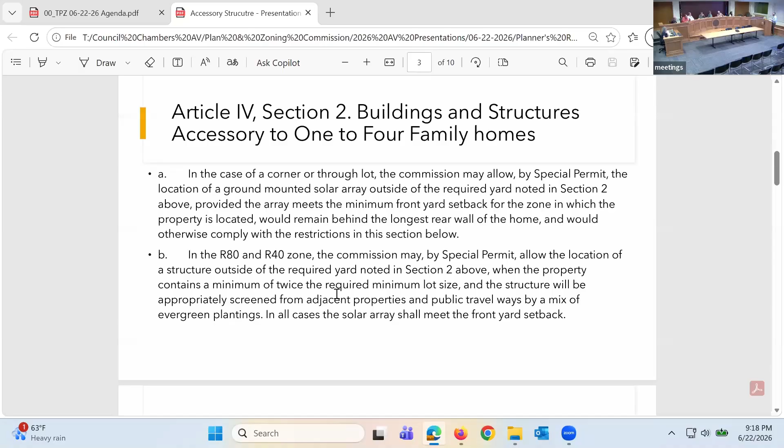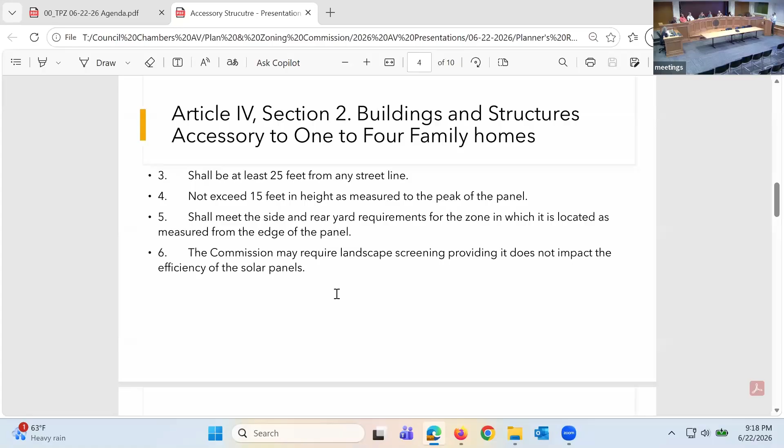And then as part of your approval, you can require landscaping to screen it, provided it doesn't impact the ability of the array to produce power. So you can't require them to put 6-foot arborvitaes right in front of the panels on the south-facing side, but you're screening the back or the sides.

I've got two more examples for the oversized lots. This is in the R40 zone, kind of an odd shaped lot. This red area would be where you're allowed by site plan. If you scroll to the next slide, this would be the area allowed by special permit, so it allows some extra area.

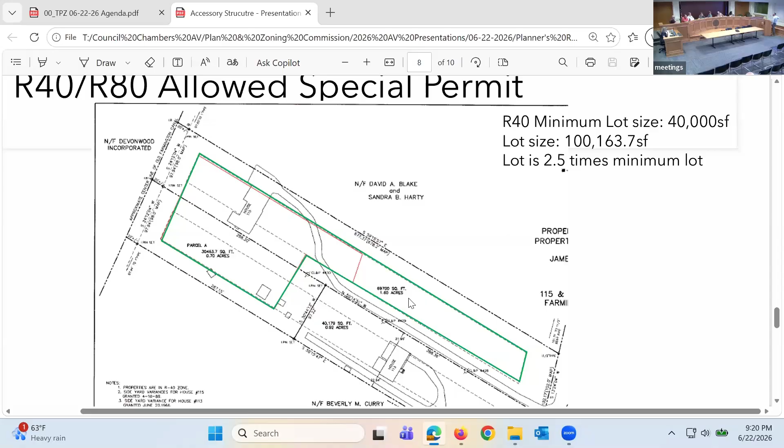I've got a shade report for this property specifically, with an aerial showing how densely wooded it is. The property is 100,000 square feet where 40,000 is required, so it's 2.5 times the minimum lot area. That would again be a special permit process, but allow them to put the solar array somewhere else.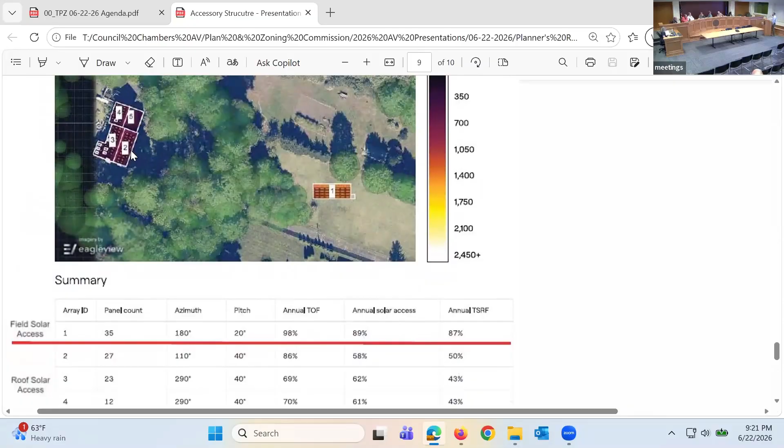But the panels on the roof, because it's got a north-south ridge line, so there's no south-facing side of the roof, at most generate 62%. On one section you've got 58, 46, and 61. At a certain point you're adding much more panels than you would need because they're not generating as much power. So again, sometimes with ground mounted, you can get a smaller array, but you have to demonstrate you wouldn't be able to meet your needs on your property.

Another example, this property hasn't come in for solar at any point, but it's up on the ridgeline, part of the ridgeline protection zone, so I thought this was a good example to show everyone. Again, R80 zone, so 80,000 square feet, but the lot is 206,000 square feet, so again it's 2.5 times. We've got the ridgeline on the left, the red and yellow, with a 75-foot setback because it's a lot of record.

Anything within that 75 to 150 feet requires special permit review. But anything on the other side of that 150 feet does not require review, so any tree clearing or things like that.

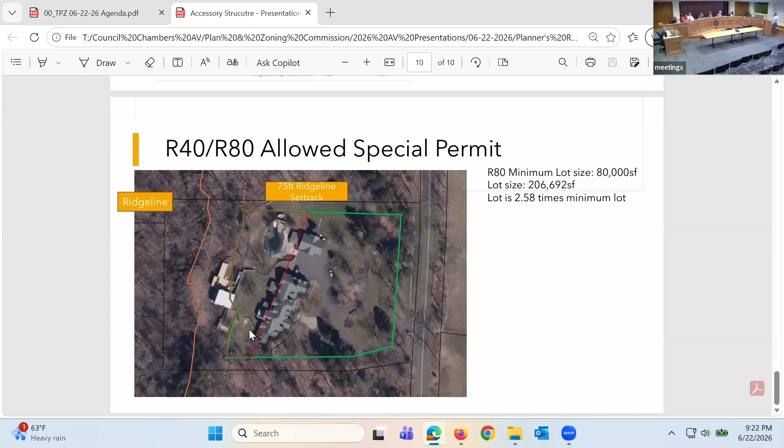Under the way the regulation is worded, this red line is the boxed-in area, the only place you'd be allowed a ground-mounted solar array. It would also be visible from Town Farm Road because of the ridge line. So allowing a special permit to put it on the other side of the house where it wouldn't be visible from the ridge line, and it might generate more power because there's actually more land area in the front. That's the reasoning for that.

In my 4.5 years as ZBA liaison, I've had 3 solar applications, all for outside of the required yard. The one on Town Farm was approved. The one on Talcott Notch was denied, but it was actually in a different area than what is proposed with this regulation. The other application was also on Talcott Notch, for a lot that was about 6 acres in the R80 zone, so 3 times the minimum.

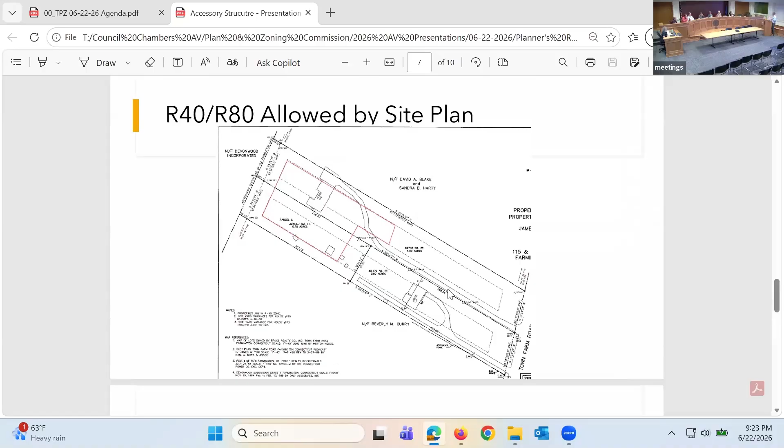Again, it was an odd shaped house with a lot of conflicting roof lines. Even if they covered the whole house in solar panels, it wouldn't generate enough electricity, so they ended up with a ground mounted array. The idea is that if you start having multiple applications to ZBA for the same thing, it's not a hardship unique to the property - it's the regulation that probably needs to be looked at.

In the future, we might revise the shed and pool regulations to align with this new solar regulation. But at this point, to make it easier, since we also have to get the House Bill Public Act text amendment through, we're just doing adding the solar at this point.

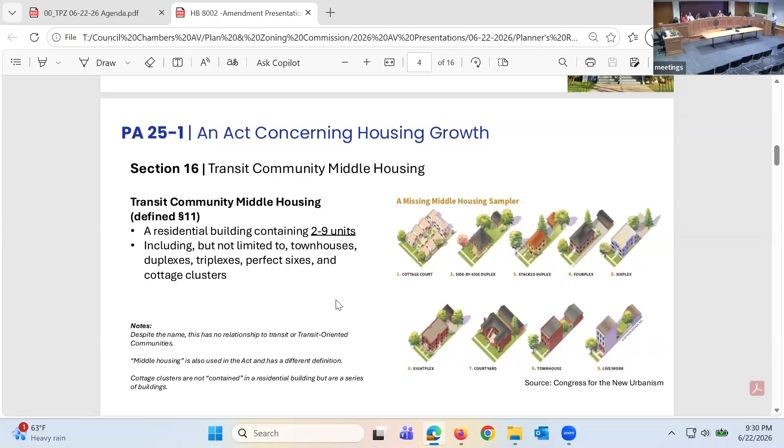I think that's it for this one. The next section deals with having to allow mixed use developments in zones that allow mixed use. This would be our Farmington Center and Unionville Center zones.

Second to last, summary review. This is the requirement that transit community, middle housing, and mixed use developments, again all up to 9 units, are permitted by summary review. Being able to be approved in accordance with the terms of the zoning regulations, including but not limited to requirements concerning setbacks, lot size, building frontage, applicable to proposed development, and without requiring that a public hearing be held, variance, special permit, or special exception be granted, or some other discretionary zoning action.

So there's no public hearings. You can't decide you want a public hearing. It has to be through site plan review only. And you can only deny it if it's not in conformance with the regulations and that public health and safety would be substantially impacted. So somebody comes in, wants to put in a duplex, it's no longer coming through us, it's summary review only. Through a site plan, and it would only be in the commercial, industrial, and mixed use zones.

So residential zones remain unchanged. No changes are being done to our standard R9, 12, 20, 40, 80 zones, or 30 - I forgot one in there. It would not affect any of our residential zones. It only applies to our commercial and mixed use zones. Gotcha.

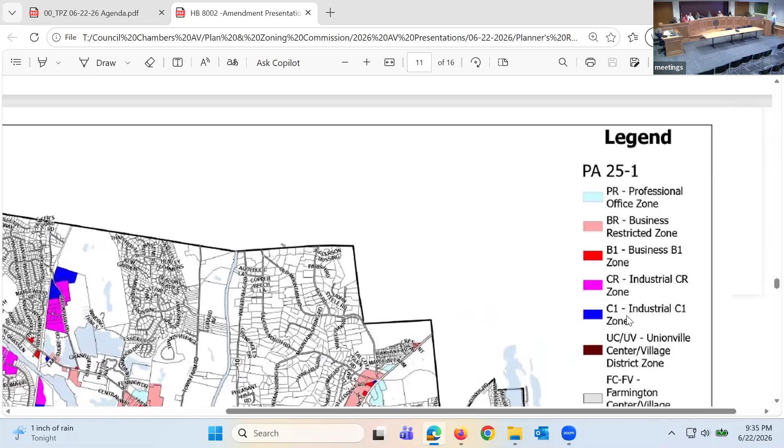So these are the zones that'll be affected by this state statute change: our professional office, business restricted, business, industrial restricted, and then our Unionville and Farmington Center zones.

So the biggest clump is going to be our industrial zone in the south section of town, but a lot of that is developed. So unless you've got a vacant property, you're not likely to see these developments, especially in that section of town where it's actually pretty well developed.

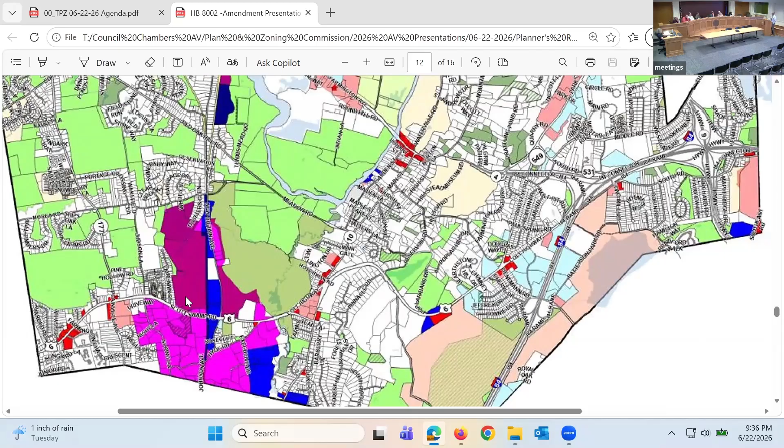The next map shows all the open space in relation to this zone. So some of that industrial zone, especially north of Route 6 and west of New Britain Avenue, is owned by the state as open space, so it can't be developed. That takes out a good chunk of the land that falls into this regulation.

I do have a chart that shows what percentage of the town's land these zones make up. Business restricted is 1.68%, Business 1 is 0.58%, professional office is 1.74%, industrial restricted is 4.62%, industrial is 1.74%, the Farmington Center is 0.09%, and Unionville Center is 0.34%.

But Garrett, this would open up the potential for redevelopment of occupied parcels, correct? Either in the same structure, repurposing it, or... Yes, right.

Unless you've got a vacancy for a long time, it's probably not likely to happen. And again, it's capped at 9 units. So if you've got a larger industrial building, you can only put in nine units. Some things are 9, some things are 16. 9 is for the summary review for residential units.

16 is for parking. Yeah, it's all over the place. It's confusing - it's taken months to figure out exactly what we had to do. The summary of changes is 3 pages long, just so everyone's aware. There's a lot that needed to happen.

Someone comes along - I'm just saying, like the industrial review - and it's a small manufacturer, and they want to turn it into 8 units or something. They still have to go through things like environmental reviews and all that sort of thing.

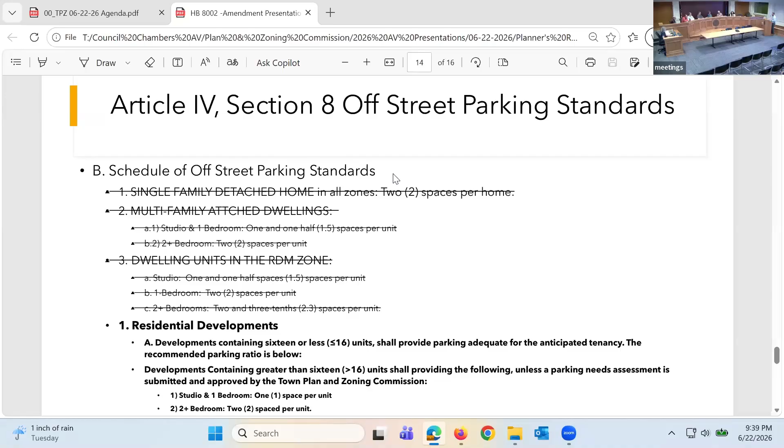First off is the parking regulation. Single family detached home, 2 spaces per home; multifamily, as I said, and in the RDM zone there were different requirements - that'll all be taken away. It'll just say containing 16 or less units provided at the recommended ratio below, and for more than 16 units, 1 space for a studio and 1 bedroom, 2 spaces for a 2-bedroom, unless a parking study is provided, submitted, and approved by the commission.

There are other parking regulations in that section for the commercial uses - that's not going to be changed at all. We're just looking at it. It only applies to the residential, and that's all we're proposing to change.

As part of this, we're going to propose some special regulations for these developments, and this has been conveyed to us that this is something we can do. These are additional requirements developers will have to comply with. For new construction, we'll give them some leeway for renovation or refitting of an existing building, but for new construction they'll have to comply with these regulations.

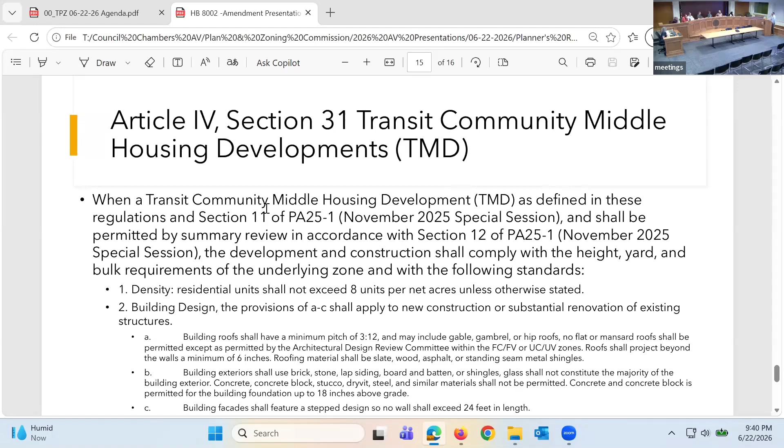We did present this to the Architectural Design Review Committee to get some input from them, because some of this deals with architectural features, materials, and things like that. We're going to get input from them and then revise it accordingly, based on their input as advisory to TPZ.

This section is going to be section 31. It is going to replace our medical marijuana moratorium that expired in April of 2015 and has just been sitting in the regulations - 11 years on, it's time to repeal that. And then we'll put in this new transit community middle housing development that has these additional development standards.

So it references back to the Public Act. Density, unless otherwise stated, will be capped at 8 units per acre. Again, these developments still have to meet the bulk requirements.

I think all of these zones affected, aside from the center zones and Business 1, have a 1 to 2 acre minimum lot size, so it still has to be a conforming lot. B1 is the only zone with a different minimum, I think it's 20,000 square feet, so you'd be capped at 4 units.

It's net acre, so you take out 75% of the area of wetlands and slopes greater than 33%. That's a metric that's used throughout our regulations.

As part of these text amendments, we're just going to add a definition at the front in the definition section. It'll still be referenced in other sections. They all basically say the same thing, just worded differently for some reason. Again, it's just something consistent so that all developments have to be similar.

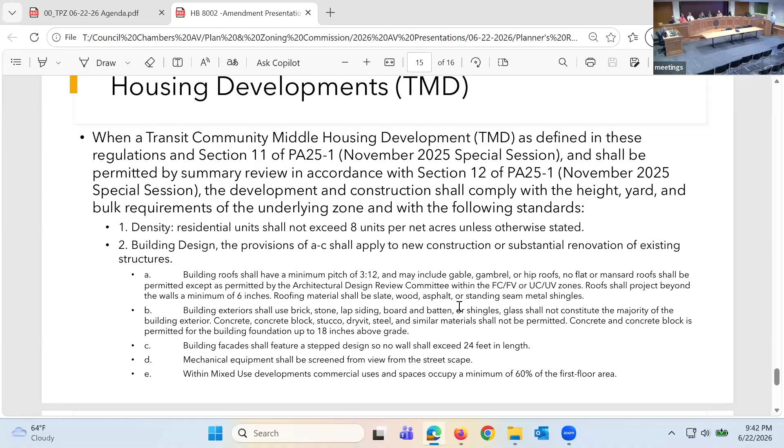Glass can't be a majority. We don't want concrete blocks, stucco, or dryvit — kind of those cheap looking building materials. There are requirements for how long a certain face of the building can be, and mechanical equipment needs to be screened.

For mixed use developments, commercial has to be a minimum of 60% of the first floor to kind of make sure it's an active, safe street. You can't just throw in one commercial unit and say it's mixed use and I'm good in our center zones.

Impervious coverage, again, meeting the underlying zones — that's your 40%, up to 50% by a 5/6 vote.

Lighting requirements: downcast, dark sky, no more than 12 foot, and capping at 4,000 Kelvin — 3,000 Kelvin, I'm sorry. And then landscaping will just comply with Article 5, Section 13, which is our landscaping regulation.

We do have some added buffer requirements. So currently, if you're an industrial zone abutting a residential zone, you've got a certain buffer requirement you have to meet — it's our B or C buffer. If you're proposing this in an industrial zone and you abut a residential zone, you'll still have a buffer requirement. It'll be a different buffer requirement, but you'll still have to provide one.

Also, if you've got a neighboring industrial site and you're putting this development in, now you've got to shoulder the burden of the buffer between the residential and the industrial, as opposed to making the industrial site the one that needs to comply. Again, like the New Britain Avenue Opportunity Zone affordable housing development, the landscape buffer that would normally be on the industrial side is instead on the housing side to protect the residents from the industrial. So we put that caveat in so they had to provide the buffer just for the residents, rather than making the industrial site non-conforming because it didn't meet that requirement.

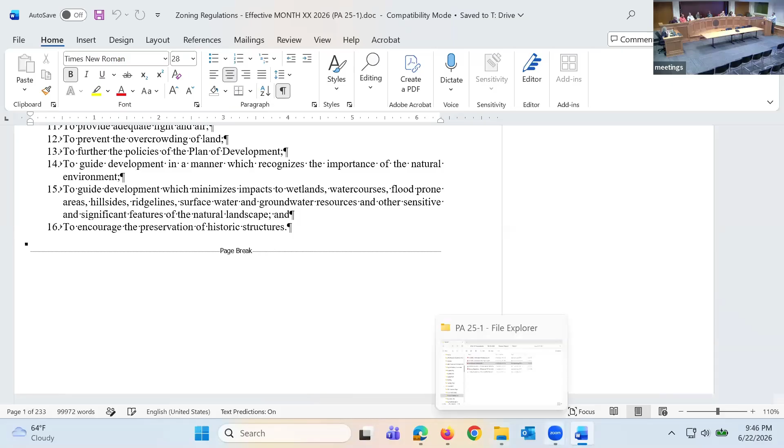There you go. And it took 20 minutes.

And we're going to have a hearing on that in September, is that right? The idea is that all three we would do in September, maybe not the same. I'll see what else comes in. Maybe do the signs and solar in one and this one in another.

But yes, that would be the intent, to try to get these wrapped up. Also what'll be happening in the fall is we will be actively discussing the POCD and starting to engage in that process, and there'll be some public participation. I'm envisioning online surveys and design charrettes, and the timing of all those things is still in flux, but it will be ramping up through the fall. Probably not so much in September, but there'll probably be more engagement opportunities October, November, December, is what the anticipation is.

So there's a little bit of light reading to do. All right, if you have any questions, email Shannon.

Shannon will. Very helpful presentation. Thank you for plowing through that. That makes it so much more accessible. I'm glad. All right, all right.